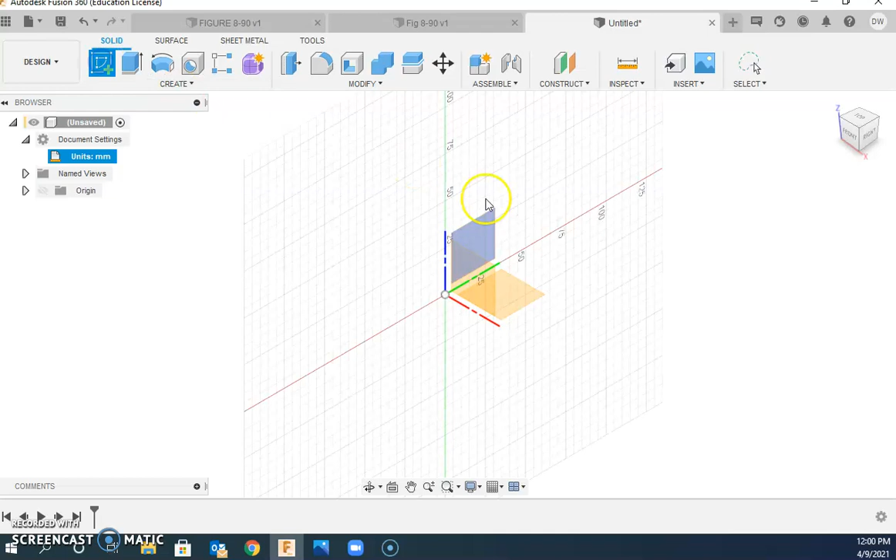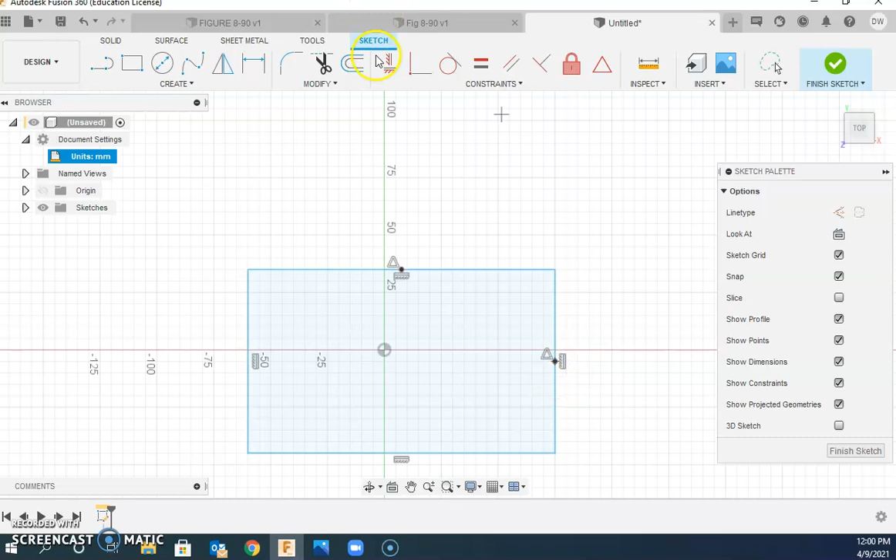And there you go. Alright, first thing you're going to do is pick a sketch and draw a rectangle on that top plane. Draw a rectangle around your origin like so. Go ahead and center it up the way that you all know how to center it. So use your point command, put a point here on the midpoint of that side, point on the midpoint of that side, and then use your horizontal and vertical constraint to constrain that to your origin.

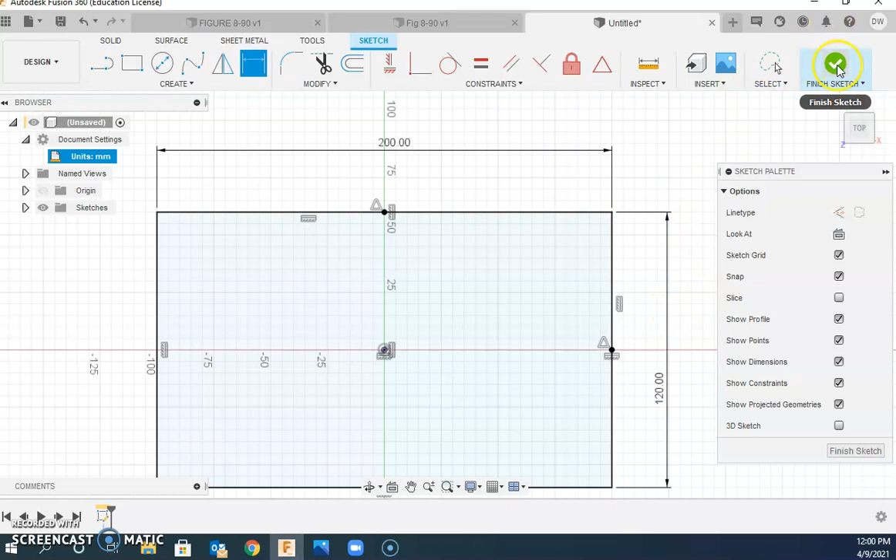Next, as we looked at just a moment ago, this is 200 millimeters wide by 120 tall. So let's get that set. Go ahead and finish your sketch there. From there, if we look back at this drawing, it is 90 units tall. And you should reference back and forth from this to your drawing all the time. So we're going to extrude this. For this one, we're going to just go that one direction, and we're going to make it 90 off that bottom plane.

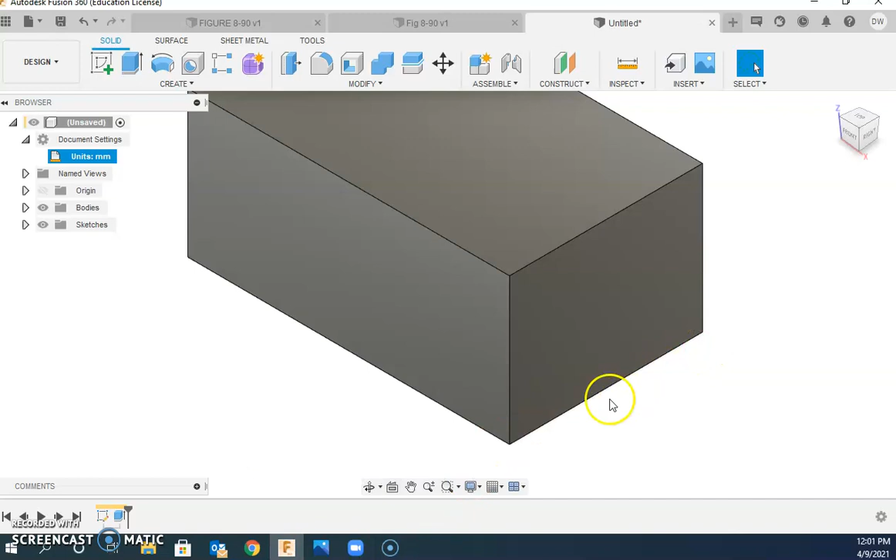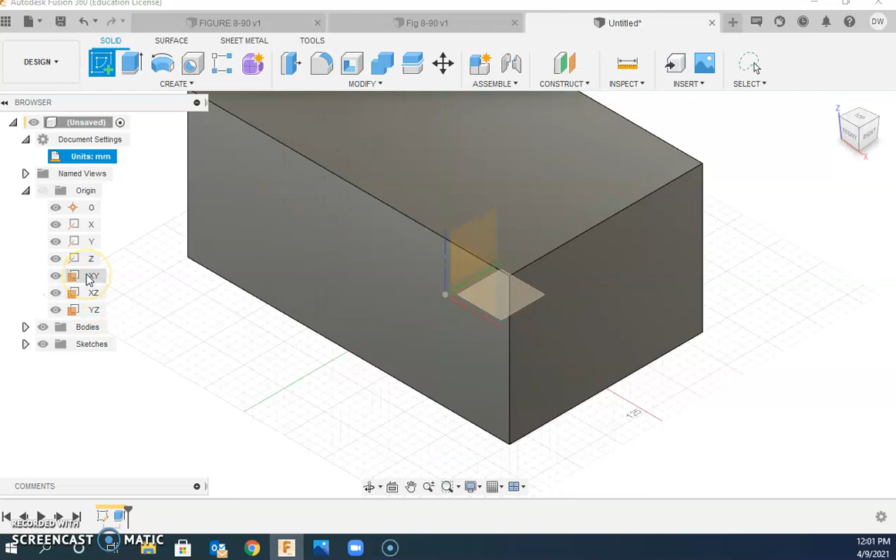And okay. Alright, next, we're going to draw this little portion over here on this end of it. We're first going to draw this arc, or the circular piece here on the end. Should be pretty basic, much like what we did on one of our last drawings. So we're going to go back here to Fusion, and note there that a radius of 25 is the first thing we need to work on. You can either click down here on that plane and select like that, or you can come over here to our origin and select that bottom plane right there, the XY.

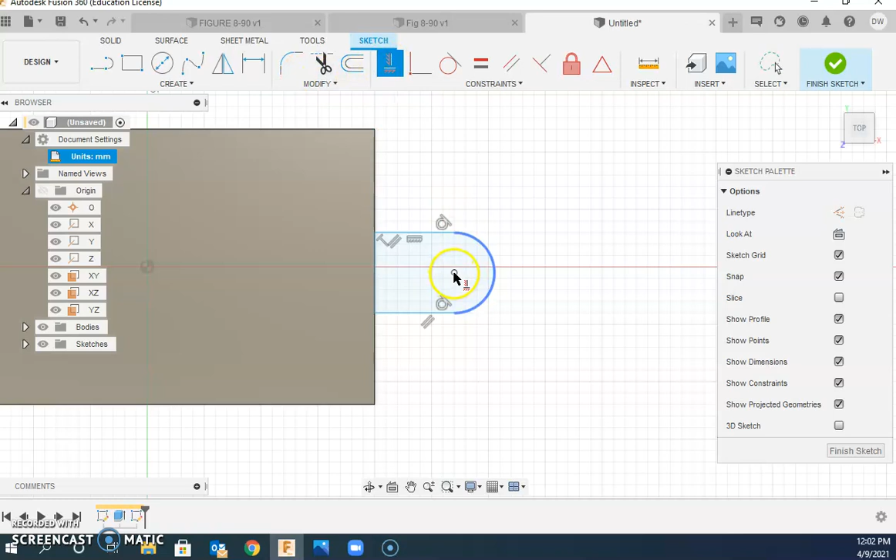Either way, we're going to come over here and draw this. We're going to start it here on the object, come straight over. Remember, if you click and hold right on top of that, you can drag an arc around. As long as you make this end of the arc line up with the other end of the arc, it will make it tangent. And we'll finish that off like so. Now, before we throw in the dimensions, we're going to throw in a couple constraints. We're going to constrain the center point of that circle to the origin. Gets it centered up nicely on that end of it.

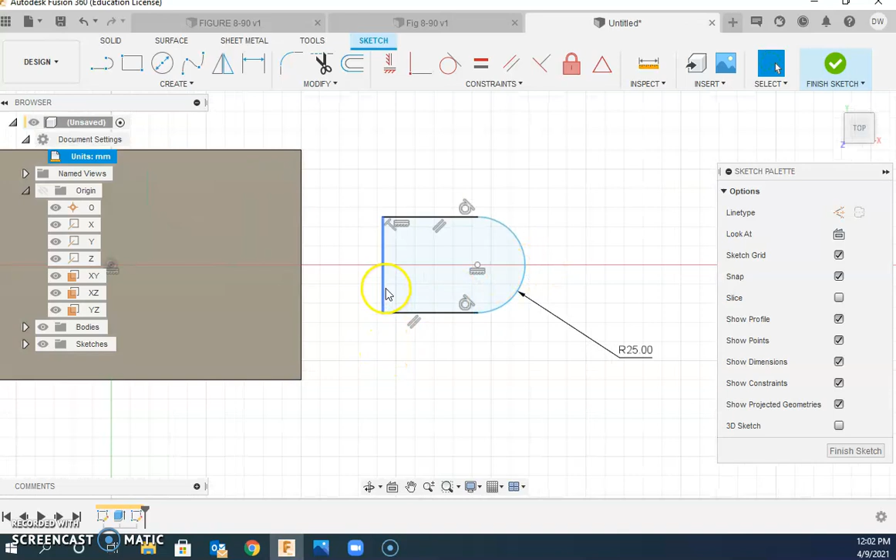And then next, we're going to put in a dimension here. And we just said a moment ago that was 25. So now, it's looking good, besides, wow, it jumped off the side there. I got to make this end of it lined up with this end. That's just going to be your collinear constraint. So we're going to come up here, go collinear, that, collinear to that. So now the only thing I'm missing is this thing stretches out here. We got to set this distance.

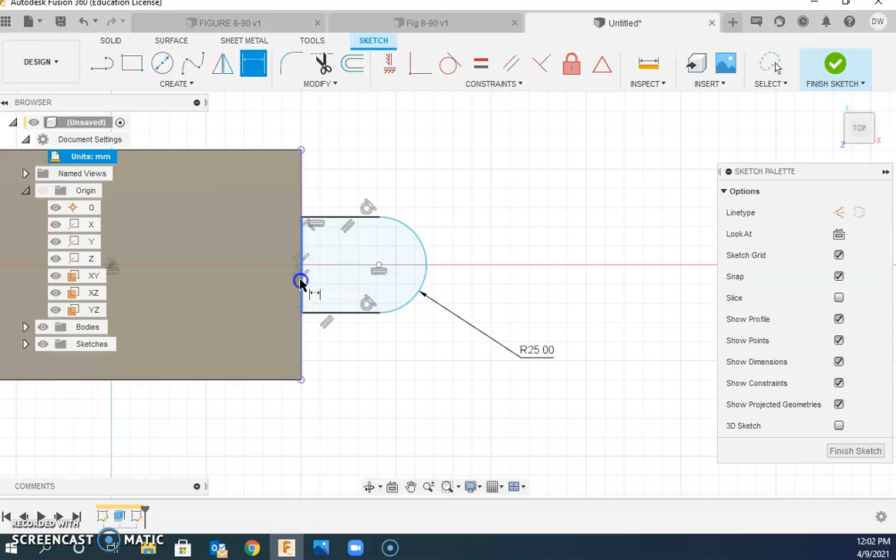To set that distance, we come and look at our drawing. To the center of that circle, it is 18 plus 20, which is 38. So we're going to set a dimension there, and put that out there at 38. There we go. 38. That is all black now. If it's not all black, you got to just drag it around and see what you're missing. Maybe you just didn't get this tangent constraint in. Add it in. Whatever it is, fix it, make it so it's all black and you're good. Finish your sketch.

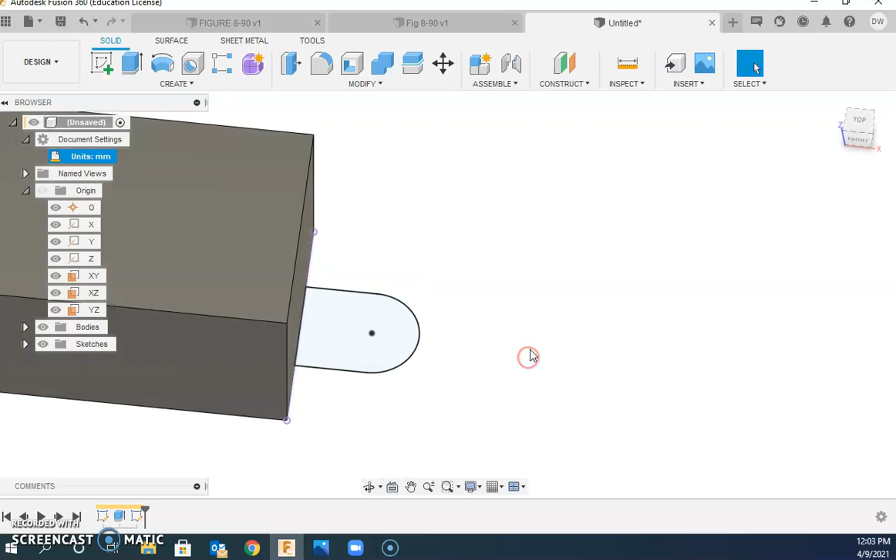Extrude this. Whoops, it was already selected. And that is extruded at 18. So we're going to go 18 there, and there you go.

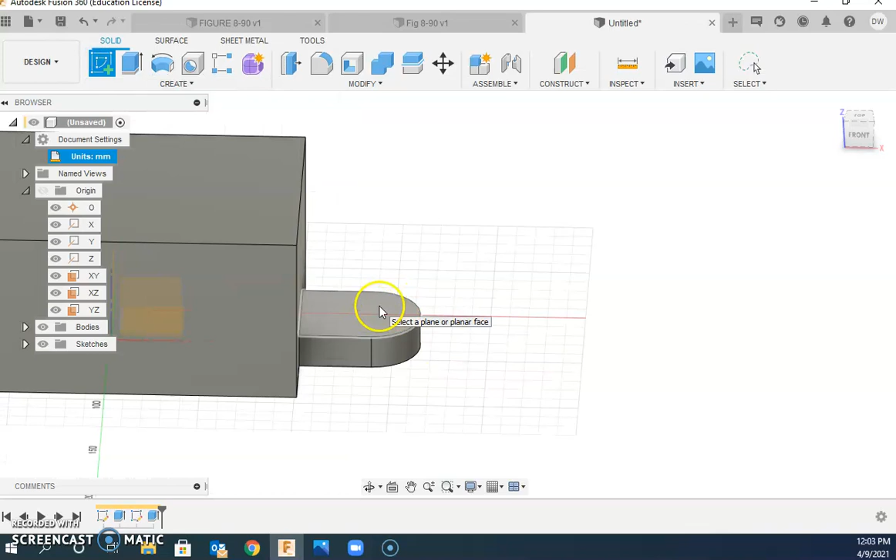Next, we're going to do our next sketch for our next little part of it. Our next part of it's going to be this portion of it right here. It's going to be basically a repeat of what we just did. So we're going to come here, back to Fusion. We're going to create our sketch here on that surface, and draw this object starting on that side, straight out. Again, remember, click and hold. We can draw our arc, and draw this. Back to, come on, back to there. There we go. So that made that nice little shape there.

Goodness, got choked up there a little bit.

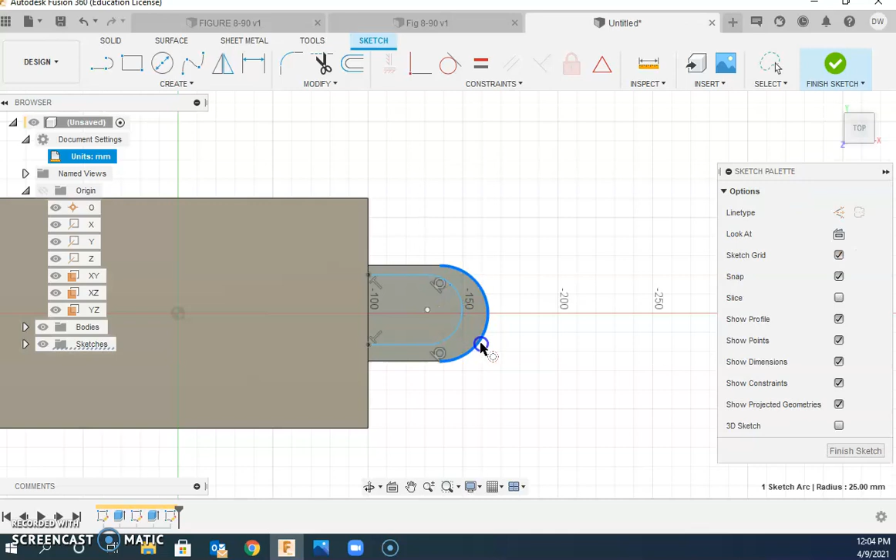Here, we're going to make this circle just concentric to that circle. So it puts it at the same center point. So concentric from there to there. Oops, I misclicked. There we go. And then the size of that is just 18, I believe, if I remember correctly. 18. Made it all black.

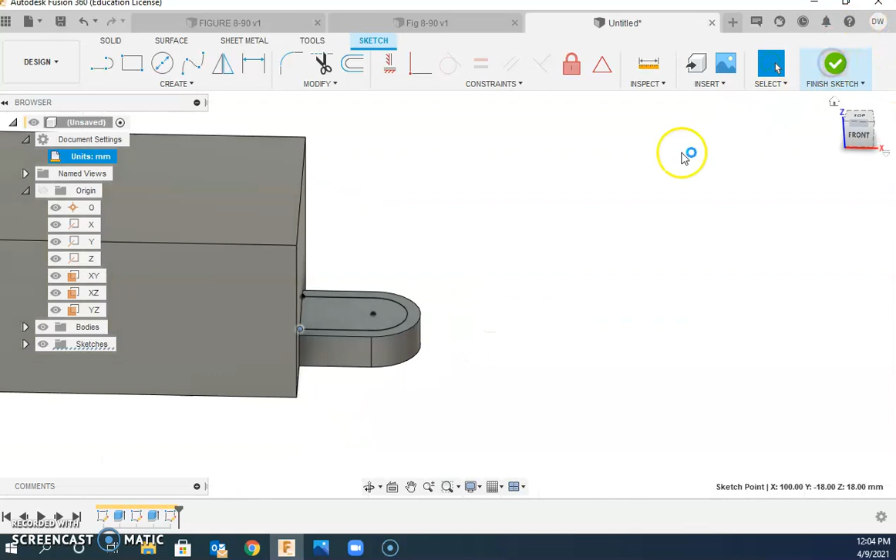For whatever reason, this one did go ahead and constrain it to that side. Why the first one doesn't, I don't know, but this one does decide to do it. But if it didn't, just make that line collinear. Should turn it all black. Finish your sketch. Extrude it. And we're going to extrude that at 8. There we go, 8 right there, and that's perfect.

Next, we're going to kind of leave that to the side a little bit, and we're going to come up here and we're going to do a negative feature. So our negative feature we're going to do, let's go back here to Fusion. We're going to do this large hole that goes out here. We're going to subtract out this whole center of it. On the next step, we're actually going to add back in some of these details that are down here.

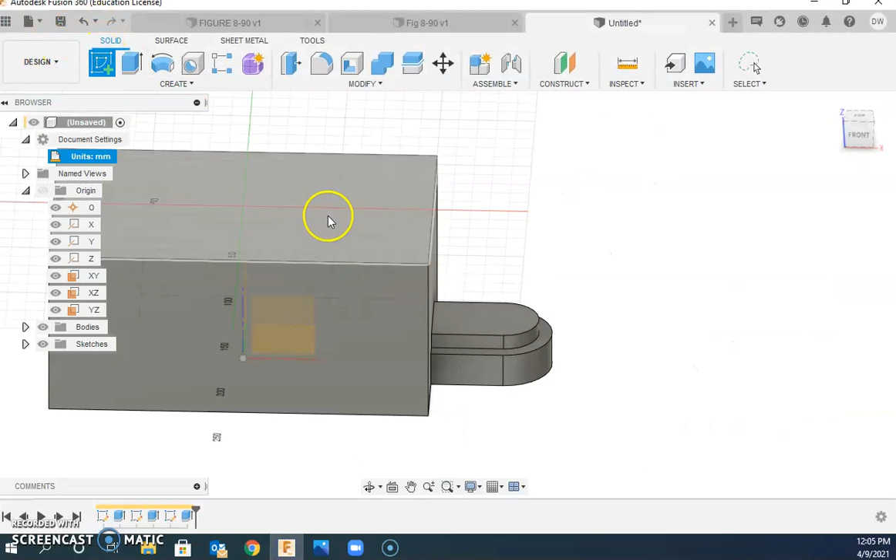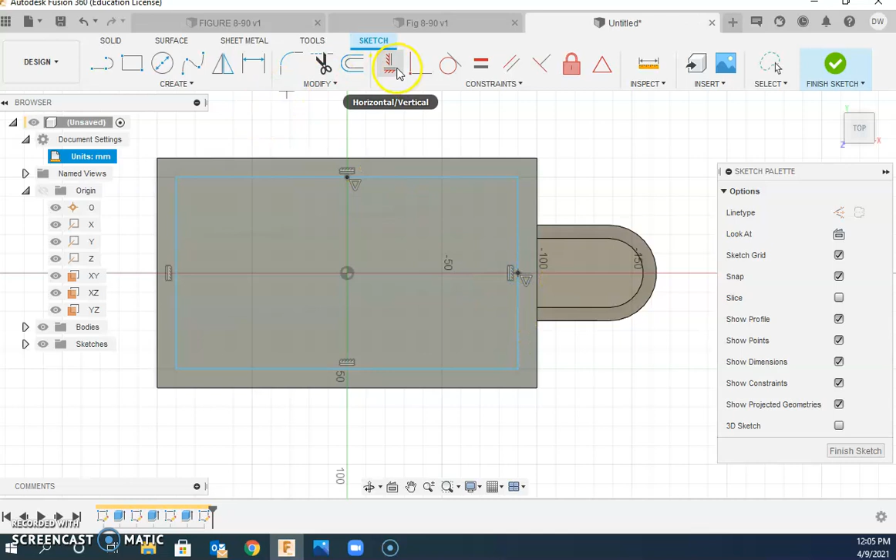So to do that, we're going to come back to Fusion. We're going to go Sketch on this top surface. We're going to pick our rectangle command and go from over here down to over here. And we're going to dimension that rectangle. Oh, actually, before we dimension it, I'm going to go ahead and center it up on my origin. So I'm going to go over to my midpoint command, put my midpoint there, put my midpoint over here, do my horizontal and vertical.

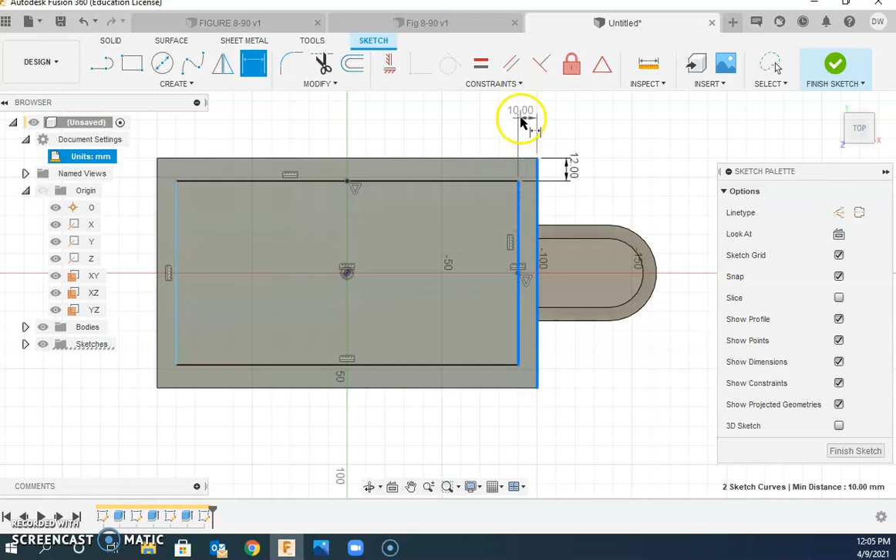Then I'm going to dimension that. And what I'm going to dimension here is from that side to there, and the measurement was 12. So I'm going to set that to 12. Then next, I'm going to dimension this one. Now this one, instead of making it 12, I'm going to click it here, and I'm going to make it match this one. It just links those two together. So then no matter what, if it changes the design, and this changes to 5, or this changes it to 20, whatever it is, it changes both of those, and that's just a good design to do that.

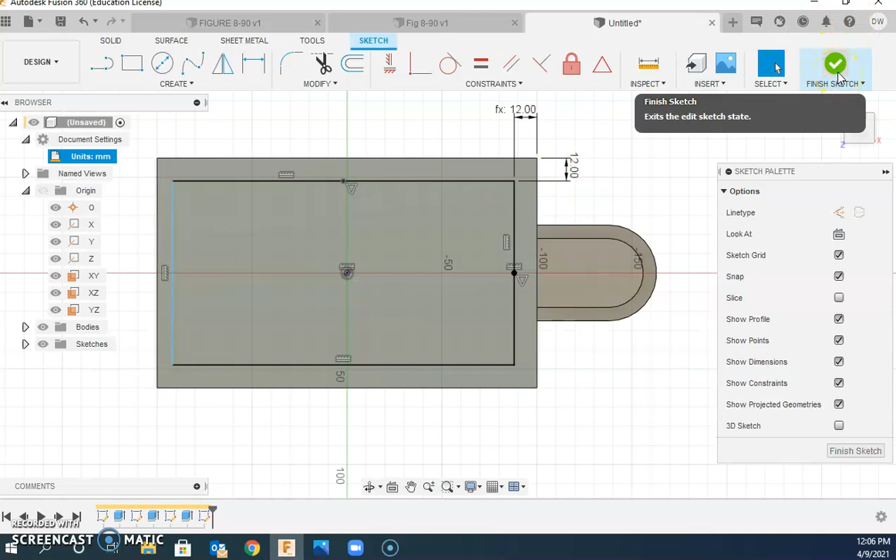So once you have that, you can go ahead and finish your sketch and extrude that and cut it. All right, so we're going to extrude and cut this. So I'm going to select it. We're going to change this to a cut. The distance we're going to cut is all, and I need to flip my direction. So I'm going to flip my direction, and there we go. That is beautiful. Okay.

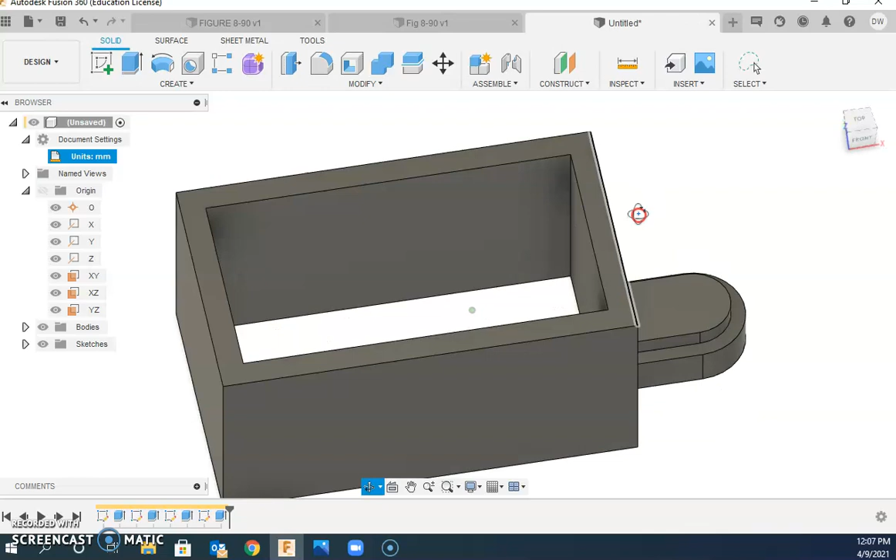Let's go ahead and go on with our next part. Everybody good there? So what we're going to do next is we're going to add in this interior detail. This is some stuff going on here. So we're going to add in all this. To do it, we're going to add it on that plane that's right there out there in the middle of our object. So the way that's going to look is like this. And I go create sketch. I'm going to hover over top of these planes.

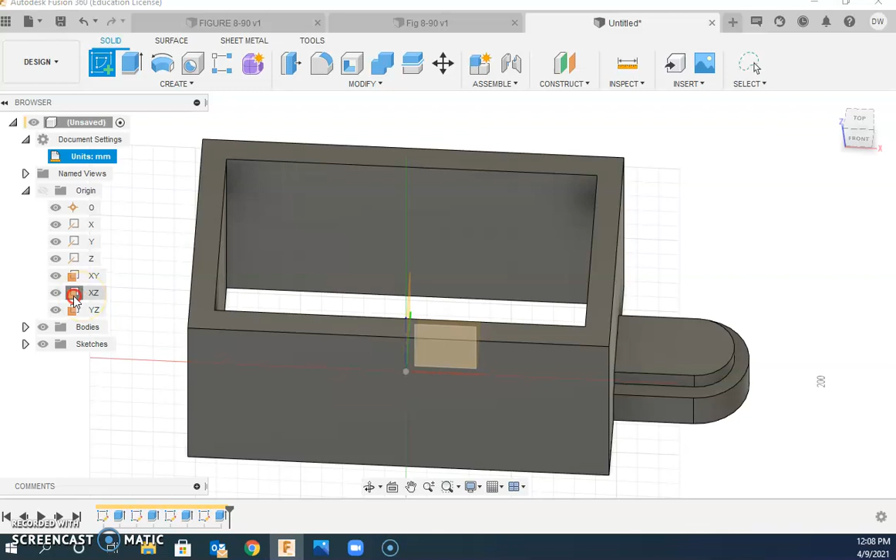Not that one, not that one. Oh wait, maybe it was that one. There we go, there's an XZ on mine. So that plane there, that's out there in the middle of my object, and it should put me right there.

Now the problem with this, what I don't love about Fusion, this was difficult, I had to look this one up. I can't see inside of this block because I'm actually drawing on that middle plane.

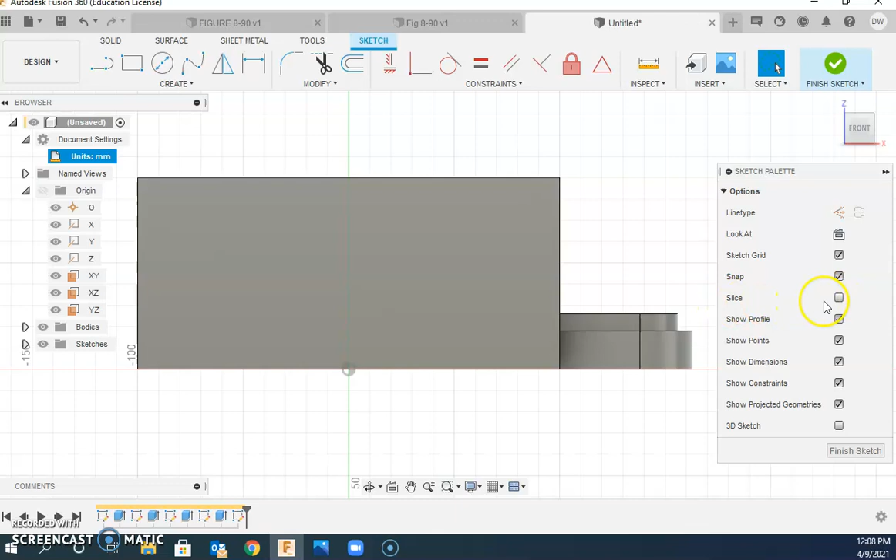Right here on the side, I missed this tab or button, slice. If you click on that and put a check mark on slice, notice what happens. It slices that off so you can see the interior of your object and see these lines. That's an important part. So now we're just going to start drawing those shapes we saw just a moment ago.

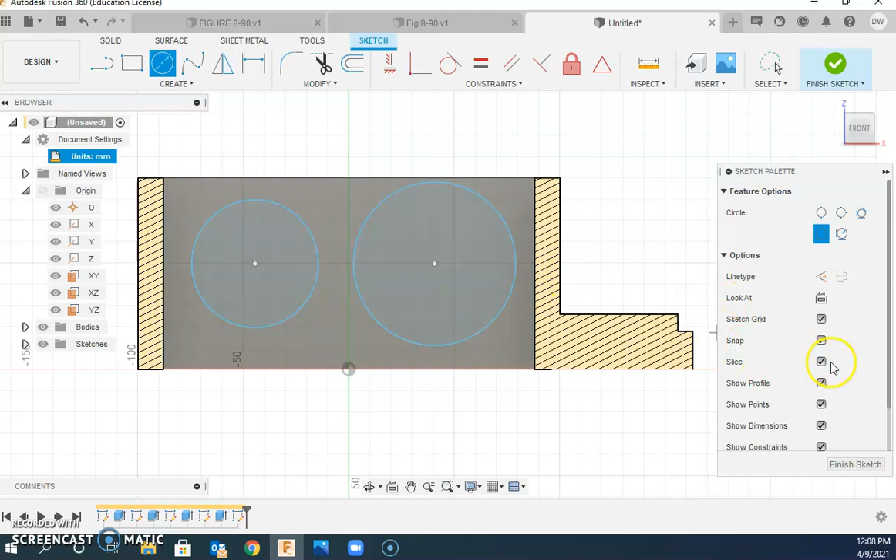So I'm going to start with drawing a circle over here and a circle over here. Over here on the side, click slice. All right, so we have these two circles drawn.

We need to start constraining these a little bit. First off, I'm going to cancel out that command. There we go, goodness. We're going to constrain these a little bit. First, they have to line up with each other. So really simple, we can use a horizontal and vertical. Click the center point of that one, and that lines them up nicely so they're locked in there.

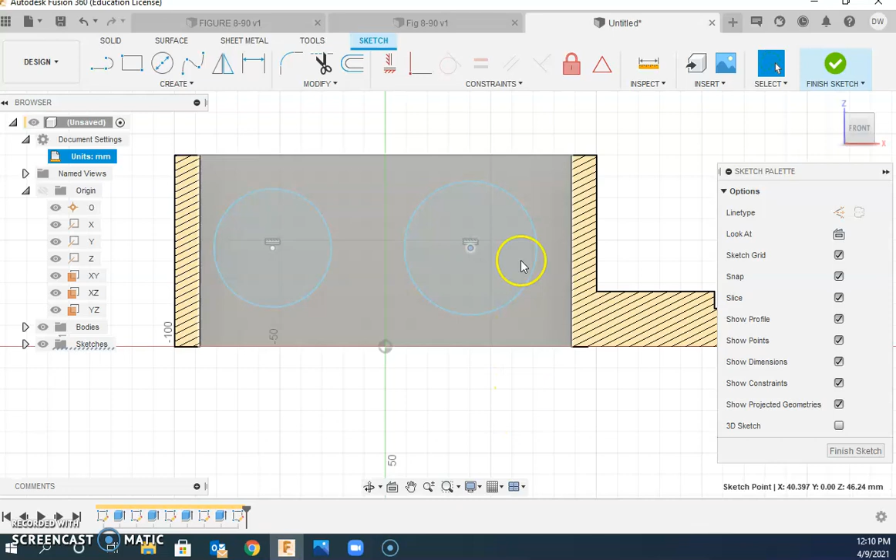Okay, next, we want both of them to be the same size. So if we come up here to the constraints and go equal, I can make that one equal that one, and now we're both the same size. So if I change the size of one, it changes the size of the other one. That's nice. Okay, let's look back at our drawing.

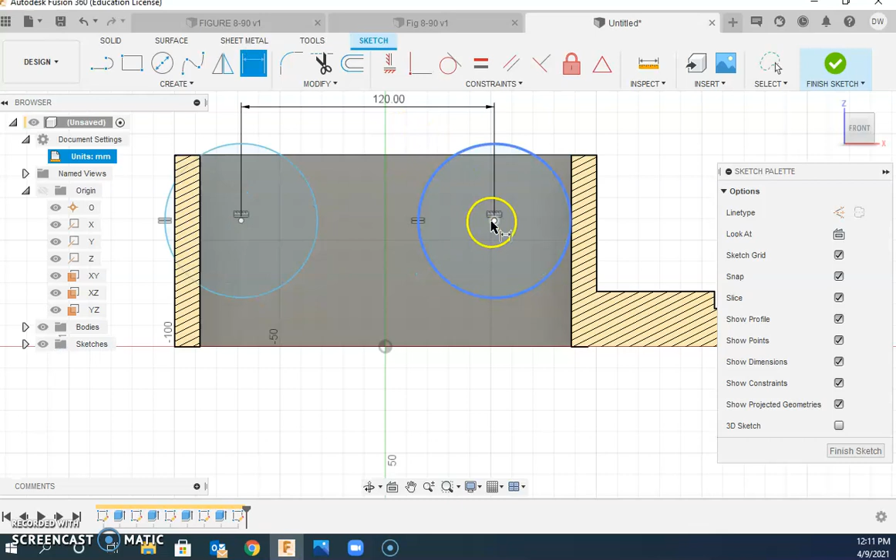Another couple things we can do: it's 120 millimeters between the center points of them, and they're 50 millimeters up. Let's do those two first, 120 and 50 to the center from the bottom and between the two. So I'm going to go from center point to center point, set that to 120. From the center point down to the bottom edge, set that at 50.

Okay, so now next, let's take a look at another couple tidbits. The next thing, the size of these is a radius of 32. And then also, there's these two parallel lines that go here and here. So let's first put in those two parallel lines, and then we'll work on that radius of 32. We'll see what that looks like.

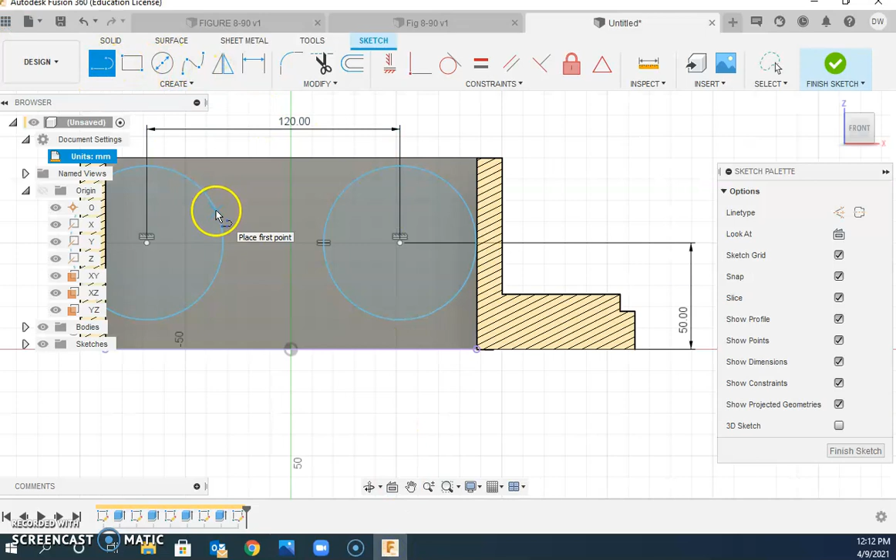So first, we'll put a line that goes from this circle. Just click there on the circle, should give you a little X there. Go straight across, you should have that parallel symbol showing up that you're parallel to the origin. Click there, that symbol shows up there. Now make another one that's down here somewhere, from there to there. Again, that parallel to the other one shows up.

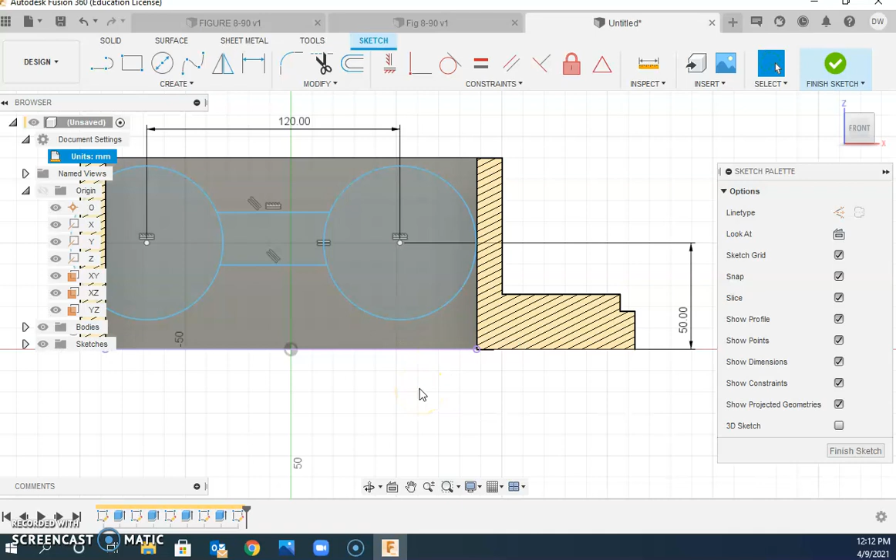Now if you go to dimension this, notice I dimension this, it gives me a diameter. Well, I really wanted the radius there. What you have to do is, it always gives a diameter of a circle. Trim these out so these are no longer circles. So if you hit T for trim, chop off that little piece in between, there and there. Now notice when you dimension this thing - oops, I didn't click on dimension - now it gives you the radius. And you can set your radius to, again, 32 is what it was.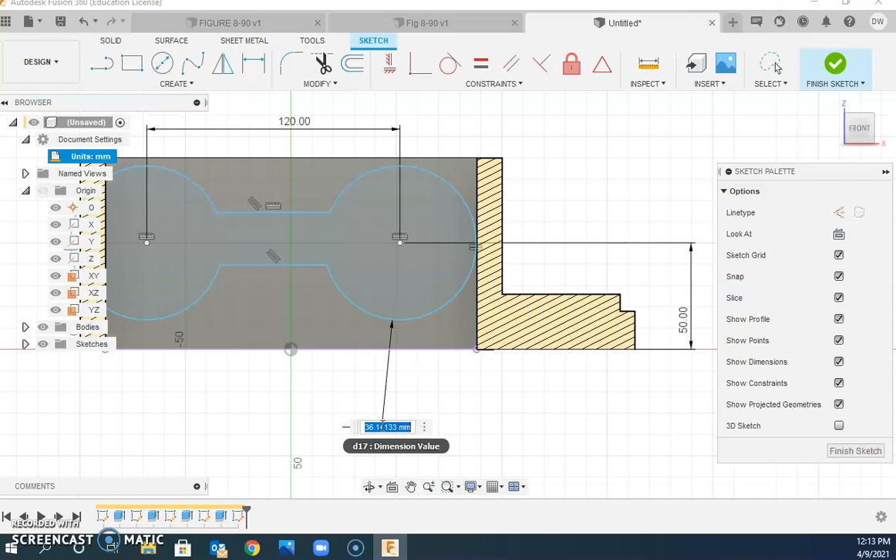So we're getting there. Okay, so now let's find a couple more dimensions. Let's go ahead and click back on our drawing. Next, it tells us this is 20 units between these two pieces here. And what else can we do? And then also that this thing is centered up in the center of the hole. So we'll get those two little tidbits here next.

So let's take a look at Fusion. To start with, we're going to dimension from here to here. And I'm going to pull it out here to the side where I can see it a little bit easier. And we're going to make that 20.

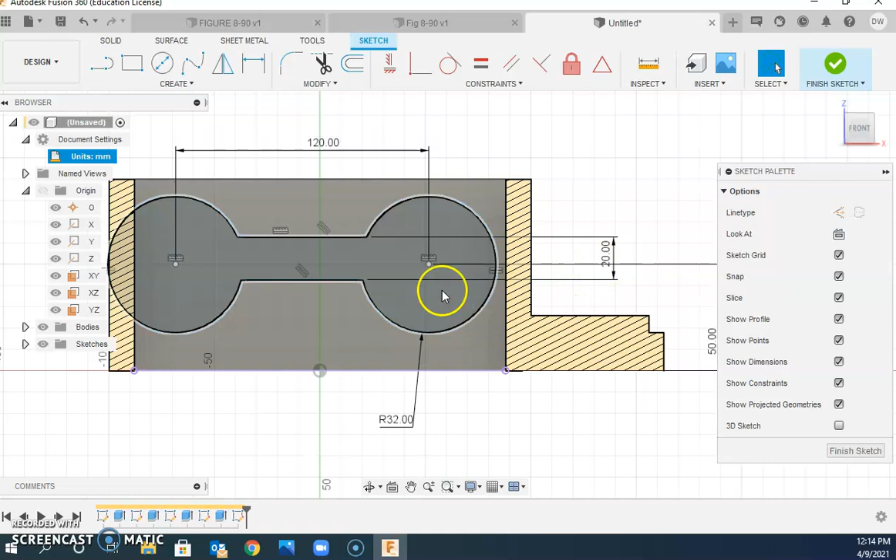Now notice what we got though. If I grab a hold of it, this whole thing moves up and down in there. We don't want it there. We want it locked into the center. So we're going to do that next.

To do that, what you're going to do is this: we're going to dimension from the center point of the circle to one of the lines, either the top one or the bottom one, doesn't matter, and pull this dimension out.

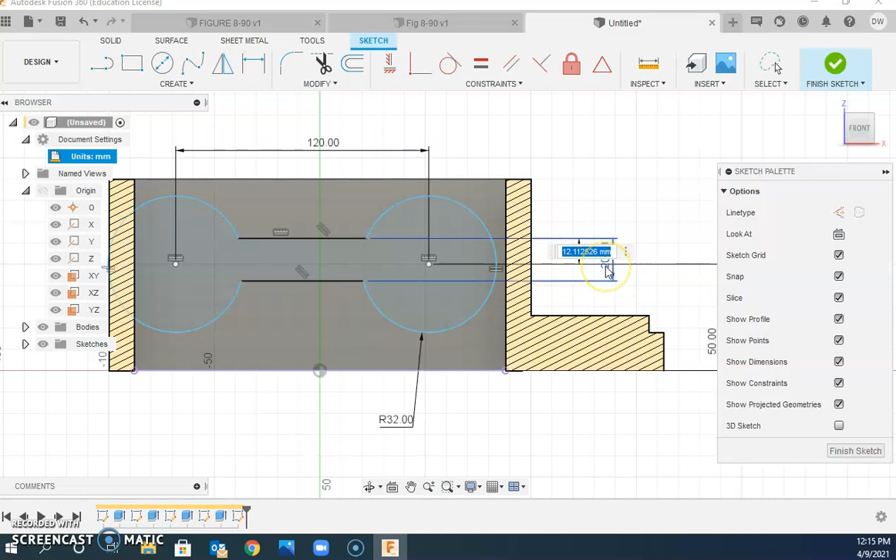Now for this, we want it to be 10, we want it to be half. But instead of doing it half, I want to show you a cool little feature of this. If we click on this other dimension, that is the 20 dimension, click on it, it tells me that's D18. That means it's dimension 18.

And now go a slash 2, so that's going to be D18 divided by 2. So it makes it half of that, it makes us 10 units. So no matter what we change this to, if we change this to 30, that's going to be 15. If we change this to 2 - whoops, I didn't get it changed - change that to 2, it's going to change it down to 1. So no matter what we do, it makes that other one half that dimension, and that's what we want. We want it linked to there that way.

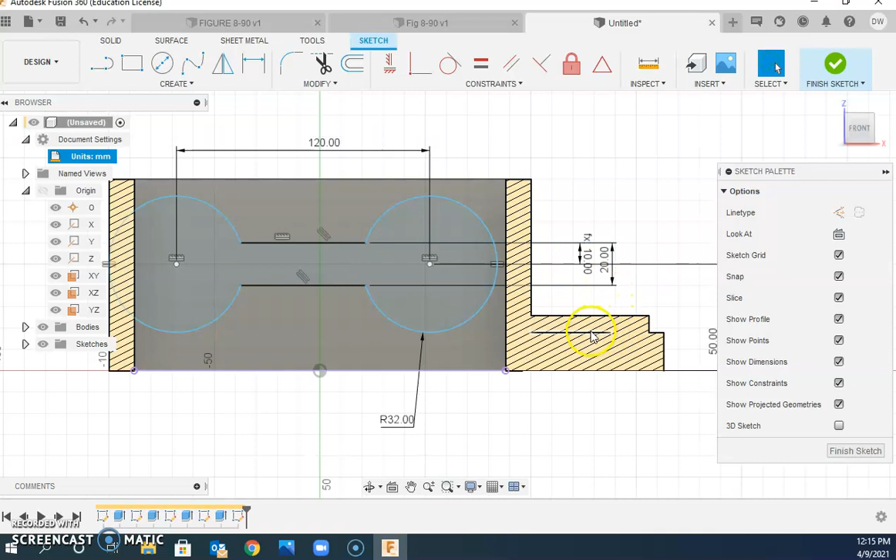Okay, so this thing's really looking pretty good here now. All I ever do here is I just grab it and see how it moves. Notice how it moves - it moves side to side. We want this thing centered up on our piece.

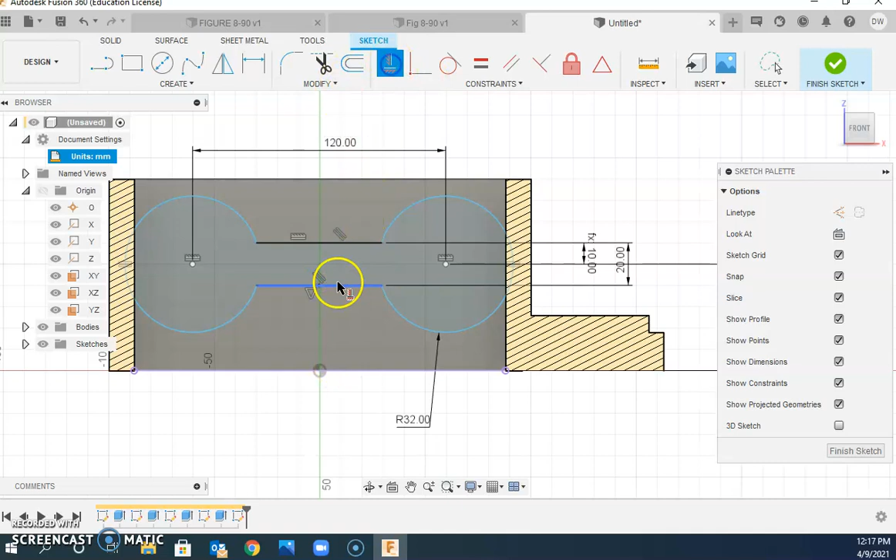So to do that, we're just going to really simply go over here, go ahead and put in a point. Put a point on the midpoint of that line, either the top or the bottom one, doesn't matter which one. Put a point there, and then horizontally and vertically constrain that to my origin. And notice that turned our drawing all black.

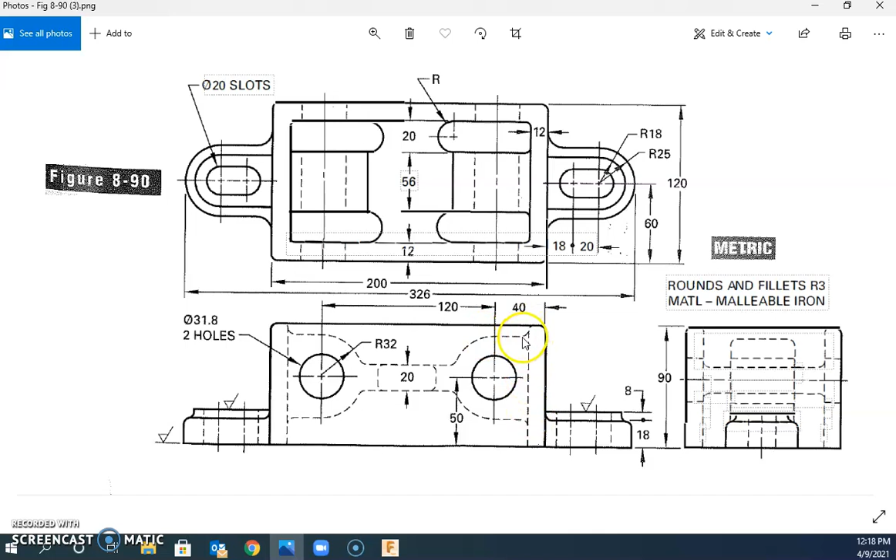Okay, so now this is all black, but however, if we look at it, it still doesn't really match this one. These are circles on our drawing, and here these are not circles - they come out straight out and then down. They are filleted here - we will fillet to the very end, so we'll ignore those fillets, but it's going to come straight on over. So we need to add that part in.

To do that, you're just going to watch this first time, and I'll try to kind of talk you through it and try to troubleshoot this as we go. It's going to be a little bit different for everybody.

All right, so for example, I'm going to start by drawing a line. I'm going to connect my line up here to the top of this circle, and actually I'm going to do the one on this side first - a little bit easier to see. I'm going to connect to the top of the circle there. I'm going to come straight out, down, and then straight over to here.

Now, the first thing we got to do is, the first thing I do is just grab it and see how it moves. So I'm going to grab this and - whoa, look how this thing moves. All right, first, this line goes at a weird angle. I don't want that line going at a weird angle. What could I do to make that not go at a weird angle?

Just spit it out. Top and bottom could be parallel, or if we just add this one to make it go straight up and down, just add a horizontal and vertical. So click on that line and add a horizontal and vertical for mine.

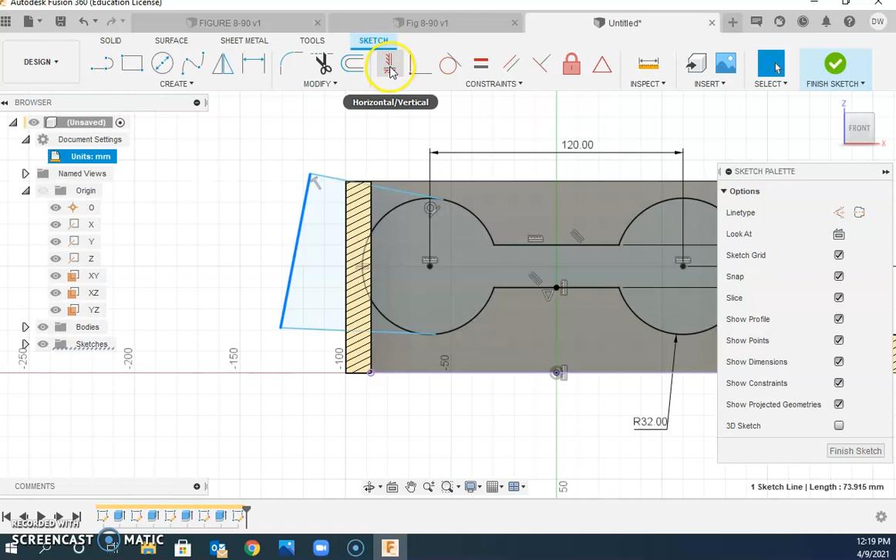Now notice what that did - it turned one of my lines black up there. This one's no longer black. Let's click on this one and see - or it's not black. All right, now what's wrong with this one? There's a couple things wrong with this one. What's one of the things wrong with this one? Somebody different.

What could I do to this corner of it? Yeah, go ahead. The angle changes - what could I do? How do I want that angle to be? Similar to what this angle is. Yeah, perpendicular. So we come up here, we select perpendicular, and we make these two perpendicular to each other.

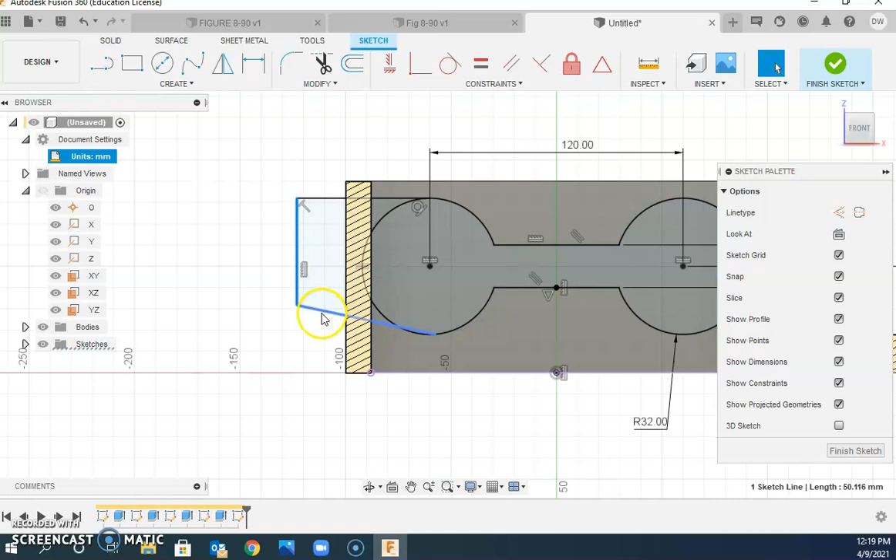Oops, if I don't misclick, that is. Oh, come on, did I not get perpendicular selected? Let me try again. Perpendicular.